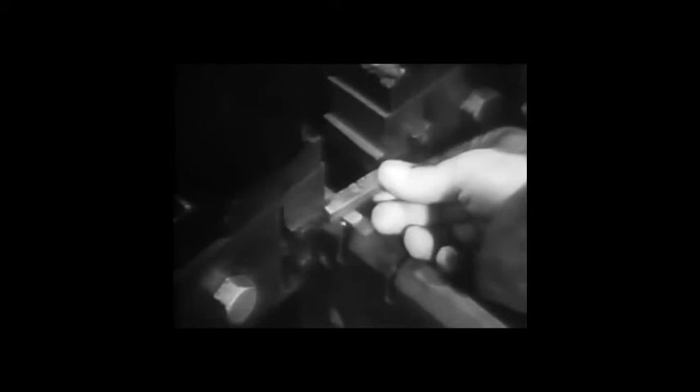When we speak of toughness, we need a quantitative guide, an accurate means of measuring it. The Charpy impact toughness testing machine answers that need. It determines the resistance to impact offered this pendulum by a specially prepared specimen bar of the steel under test. The specimen is placed across the pendulum's line of travel. The pendulum is drawn back to a fixed angle.

When the pendulum is released, the energy required to break the specimen reduces the swing of the pendulum. This dial registers the pendulum's travel. It measures in foot-pounds the energy required to break the test piece. This is a measurement of the steel's toughness.

When previously hardened steel parts are to be toughened by tempering, they are first reheated. Tempering temperatures are below the steel's lower critical temperature, the temperature at which the steel first began to harden. The parts are kept in the furnace until they are uniformly heated. Thus, tempering time depends on the thickness of the pieces and the temperature to which they must be brought. After heating, the parts are removed from the furnace and allowed to cool in air.

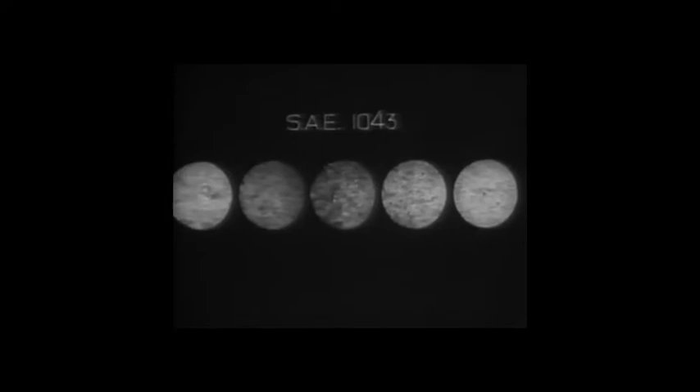What has happened in this process to change the properties of the steel? Here are 5 micrographs of an SAE 1043 steel, which show its structure after tempering at progressively higher temperatures. In each stage pictured here, the steel is tougher than in the previous one.

The first micrograph is of the fully hardened steel. It shows the typical martensitic structure of plain carbon steel at maximum hardness. The steel's Rockwell C reading, the measurement of its hardness, is very high, 60. On the other hand, its Charpy reading, the measurement of its toughness, is very low, 3.

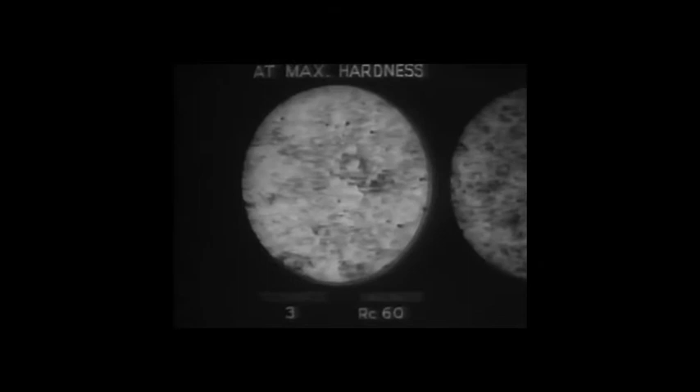When the steel has been tempered at a higher temperature, 650 degrees, a recognizable change can be seen in the structure. The carbide has started to precipitate from the martensite. The carbide appears black in the micrograph. The toughness, however, has barely changed. It is now at 6.3, even though the hardness has decreased to 49. It is necessary to go to higher temperatures to obtain marked toughening.

Tempering at 900 degrees produces a further precipitation of carbide from the martensite. These carbide particles, diffused in the martensitic structure, are beginning to coalesce. Now the steel's toughness has jumped to 22. Its hardness is down to 39.

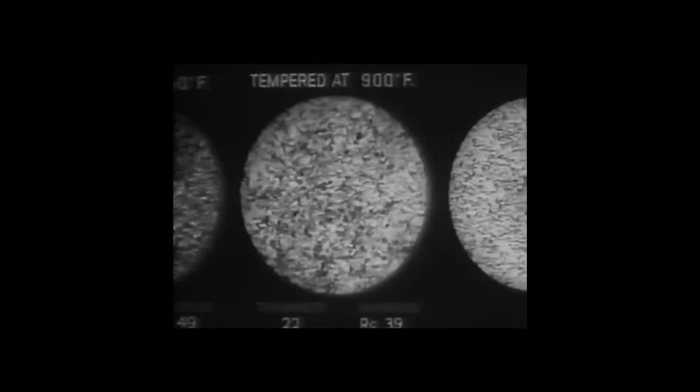This micrograph shows the steel after tempering at 1275 degrees, a heat closely approaching its lower critical temperature. A definite coalescence of the carbide particles has taken place. This is discernible where the black lines have broken up into dots. The steel is now very tough. Its Charpy reading is 65, but it is quite soft. Its Rockwell C is 20.

From these and additional test data, a graph can be made to illustrate the relation between the toughening of the steel and the accompanying change in its hardness. As abscissa, we have the tempering temperatures in degrees Fahrenheit. As ordinates, we have the Charpy impact toughness in foot-pounds. We plot the values obtained by testing our steel after tempering at progressively higher temperatures. These points give us this curve.

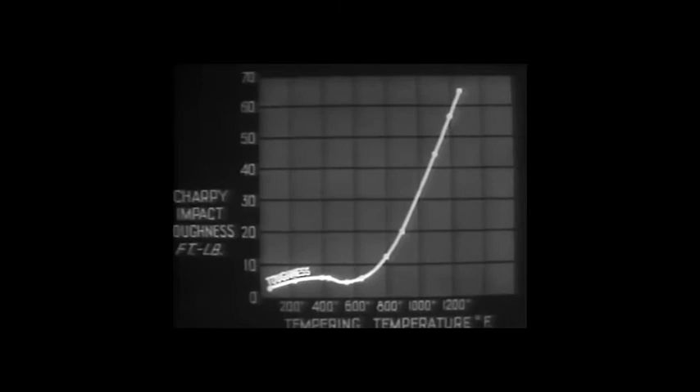Now we also plot as ordinates the hardness readings of the steel at the same tempering stages and obtain this curve. We can see that there is a generally consistent relationship whereby hardness decreases as toughness increases.

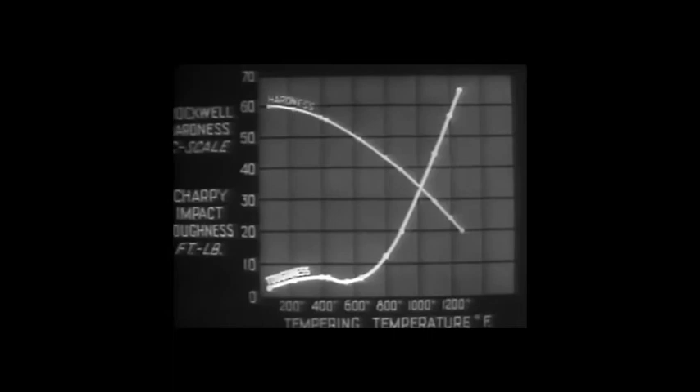But there is an exception to this rule. Between 450 and 650 degrees, toughness actually decreases a little. However, there is no corresponding deflection in the hardness curve. This is called the brittle tempering range. But at temperatures above this range, and particularly beyond 800 degrees, the toughness increases very markedly. The same graph, drawn for any other plain carbon steel, would show a similar relationship between toughness and hardness.

This video is going to look at C.1.6, describe the effects of heat treatment in steel. So basically, once we've started to create the steel, we want to be able to manipulate the steel to suit the purpose. So for example, steel in a car may not need the exact same properties as steel in a building. So heat treatment is the way that we actually alter the size, arrangement, and interaction of the grain structures that make up metals and alloys.

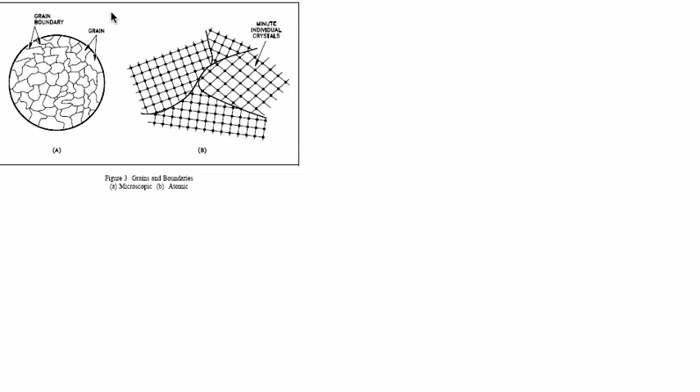So what does that mean? Well, if you zoom in on a metal or an alloy, what you see are these grains. And these grains are basically sections of atoms that have lined up in the same crystal, they have the same alignment, and then another grain has a slightly different one, slightly different one, slightly different one. And that's beneficial to us through heat treatment. We introduce this and change it.

And that's beneficial because if we had just a perfect metal where everything lined up, it's not as strong, because if everything lined up perfectly, it would kind of be like a stack of paper, and you know how you can easily slide one piece of paper off the top because it all lines up very easily. So they could just slide by each other. Your metal would not actually be very useful then. It wouldn't stick together as well, and that's why you wouldn't want to pick up a big stack of paper on the side. It would just start falling out because everything can slide so easily.

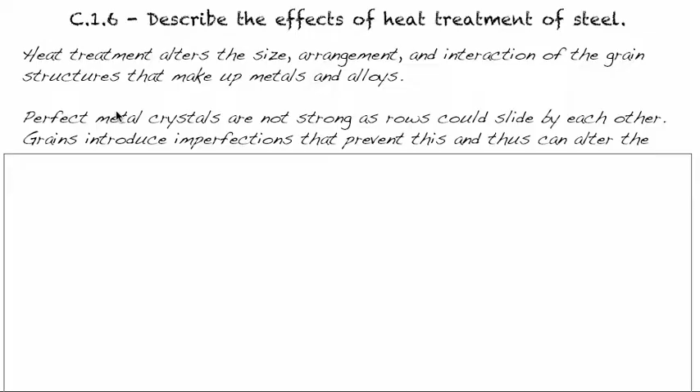So what we do in heat treatment is we introduce these grains, and so these grains are imperfections. Now they can't slide past each other. There's no straight flat surface, and so that can alter the strength of our steel.

So to get a bit more specific in what we're actually altering, heat treatment alters number one, hardness, and the hardness is how strongly the metal resists changes in shape. So can you bend this metal into a new shape, or is it very, very difficult to make it change shape? Toughness is related to how much energy it can absorb before breaking.

So often if you have something that is really, really hard, if you hit it, it will shatter. And that's because something that's very hard is not tough. So for example, toughness, we can often describe as brittle. A brittle metal is something that is very hard, but it's not tough. In other words, it will break if you hit it. As hardness increases, you should know that toughness decreases. They have an inverse relationship.

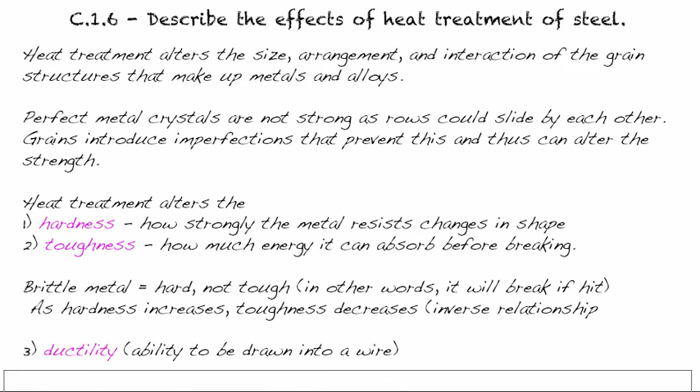Ductility is the third one that we're changing, and that's the ability for something to be drawn into a wire. Now that we've cleared up these words, we can actually look at the heat treatment itself. So I'm going to bring up another slide here. So there are three processes we use. The first one is called quenching, and you can see that in the introductory video.

This is basically, we use the highest heat. It's sort of the first step of heat treatment after we've created something, if we want to create metal that's harder. So we heat it and then we cool it quickly in water or oil. And so what that looks like is something like this. We heat it up and then we submerge it. So it's going to cool down very quickly, and I'm highlighting quickly right there because we're going to compare it to the others later on. In water or oil, and sometimes we do it in oil if we're particularly worried about corrosion.

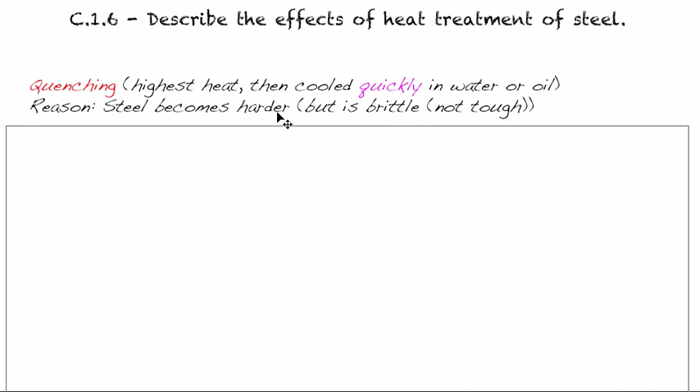So the reason we do this is the steel becomes harder through quenching. But the problem is it's brittle, it's not tough. So what happened there is it became harder. We've changed the grains to make this steel harder. Now after that, it's hard but not tough. So that may have a good application in some things, but quite often we want something that is tougher. It can absorb energy without breaking.

So then the metal will usually go into tempering. And so what we'll do is we'll heat it again, but now it's going to be cooled more slowly in the air. So here's the difference in how we cool it. Now the reason we do this is the grains are changing again. It's becoming tough and springy. So we're increasing the toughness. It's becoming less hard, so it can change its shape. That's why it's springy now. So again, inverse relationship. More tough, less hardness.

Reason two is internal stresses. So for example, if there were some crystal structures that were distorted or some micro scale gaps in the structures inside the metal, those internal stresses are removed through this process. And then reason three, it replaces the brittleness with toughness. And that's actually another way of restating almost reason one. But these are the three reasons they accept in the exam, so I would write all three of them.

The last process is sort of a separate one. So we'd usually go through quenching, then tempering to make something that's harder and tougher. Annealing is what we're going to do if we want to make something softer. And if we're making something softer, it's actually making larger grains. And we're also making it more ductile, so we can draw it into a wire. So the difference in this is that we're going to heat this and keep it hot for several hours, and then cool it down very slowly, more slowly than tempering. So those are basically the highlighted differences of the different heat treatments of steel. And in the exams, they tend to ask about tempering a lot more often.